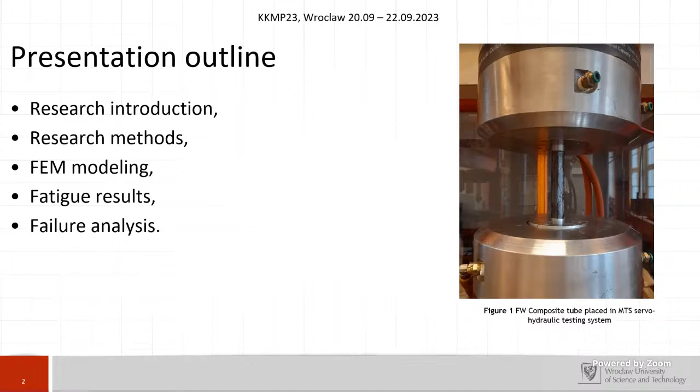Here you can see my sample placed in the MTS testing system. So, at the beginning, the research objective.

Basically, composite materials are still less mechanically understood than commonly used metallic materials. But there is increased use of composite materials, especially in structural engineering and structural objects, and it requires a sophisticated campaign to provide safety of the in-service use of the object.

In that, we identify a gap in the literature, which involves the multi-axial fatigue behavior of composite materials. In my case, it's thin-walled structures made of carbon fiber reinforced polymer. The goal and objective of the research is the fatigue and fracture characterization of CFRP under non-proportional multi-axial fatigue.

The fatigue is investigated under proportional loading as a reference, and non-proportional tension-torsional load. Then the fatigue behavior - I will show SN curves and the results that we've obtained. In the end, in the project, I also would like to estimate the fatigue lifetime, but here it's not included.

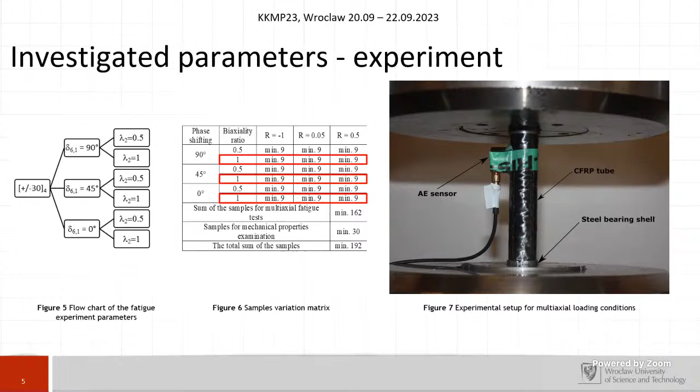Figure 7 presents the experimental setup. As you can see, we have the sample and additionally the acoustic emission sensor.

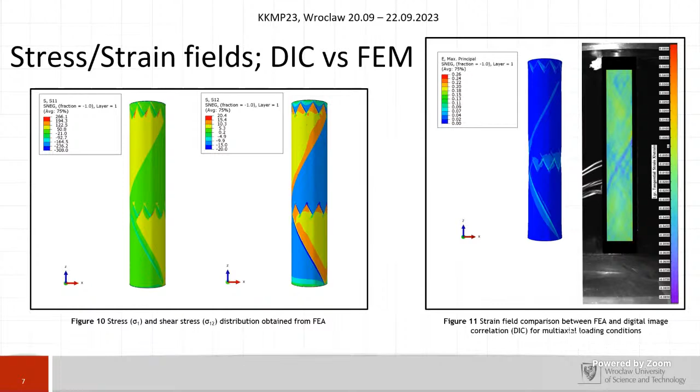Now, I have the validation because additionally, we use the strain gauges to verify DIC and the finite element method. In this case, strain gauges were not able to measure the strain at failure because the strain gauges debonded from the surface due to the large deformation. Thanks to DIC, we could measure the maximum strain.

Now, we had the static campaign. Let's move to the multi-axial fatigue. At the beginning, I would like to show the phase shifting. We have for 3 different stress ratios, 0.5, and it is at room temperature. We have for another stress ratio as well.

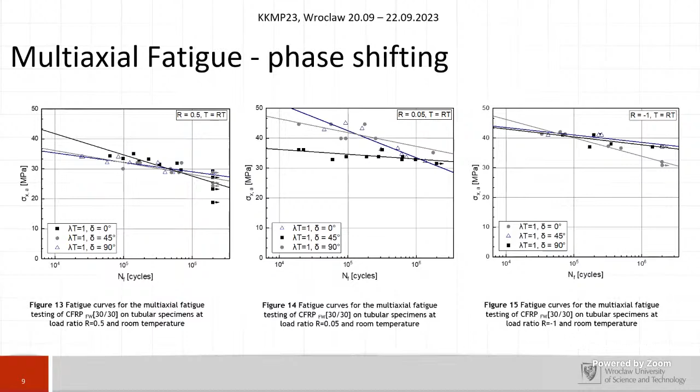So now let's move to the acoustic emission analysis. So far, it's quantitative analysis. I plotted the number of counts and time, and it was possible to see the failure mechanisms such as matrix cracking, delamination, and fiber breakage.

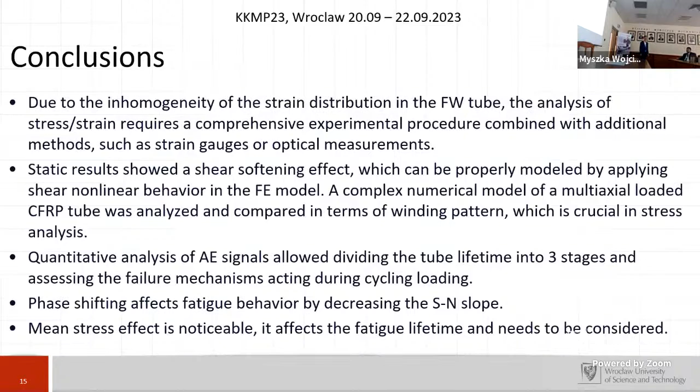The quantitative analysis of acoustic emission signals allows dividing the lifetime of our sample into 3 stages and assessing the failure mechanism. Finally, the phase shifting affects the S-N curve. And in the end, as I said previously, the mean stress effect needs to be considered in further modeling. So thank you for your attention.

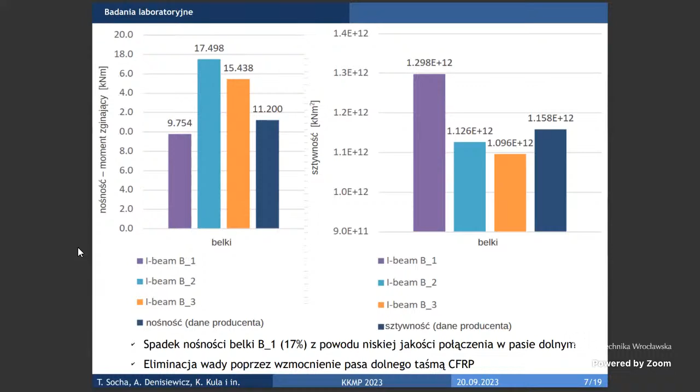Jeżeli chodzi o sztywność tych belek, to sztywność w wypadku tej belki, która uległa zniszczeniu, była większa. Ale to nie ma jakiegoś znaczenia, połączenie było mniej więcej w środku rozpiętości. I powstał właśnie pomysł, żeby wzmacniać takie elementy poprzez zastosowanie materiałów kompozytowych, konkretnie taśmy CFRP.

Proszę kolejny slajd. Model analityczny został zbudowany przy szeregu założeń. Ten model pozwolił nam na określenie odpowiedniej długości zakotwienia takiej taśmy, czyli na jakiej długości ona musi być przyklejona do belki, żeby dawała efekt wzmocnienia.

W modelu analitycznym uwzględniono tylko liniowo-sprężyste zachowanie się materiałów. Wytrzymałość drewna przyjęto taką samą na ściskanie, rozciąganie i zginanie. Analizowano skrajny przypadek, gdzie uszkodzeniu ulega pas dolny.

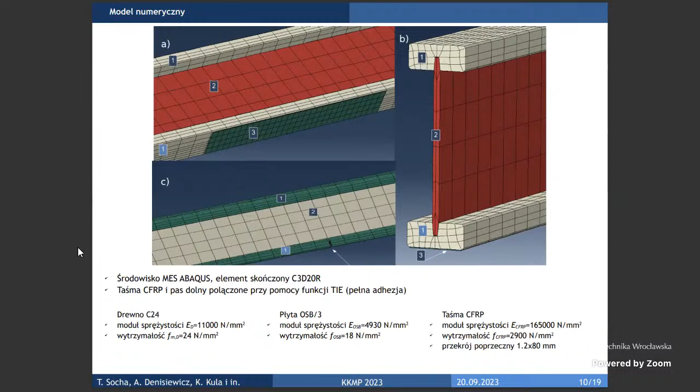Pasy ze środnikiem w modelu zostały połączone na sztywno, tam nie ma poślizgu, jak również przyjęto założenie, że sama taśma z pasem dolnym też jest połączona na sztywno, ponieważ klej ma większą wytrzymałość. Jeżeli ulegnie zniszczeniu, tutaj delaminacji, to po prostu zostanie zerwane drewno.

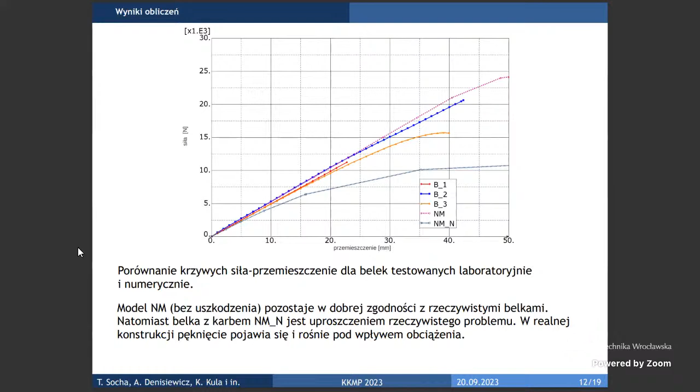Tutaj mamy już zbiorcze wyniki: belka bez wzmocnienia z nacięciem, belki z badań laboratoryjnych, belka z badań numerycznych bez nacięcia i z nacięciem, czyli z symulacją uszkodzenia z cyferką 60 - podklejoną na odcinku środkowym na długości zakotwienia - oraz podklejone belki taśmą na całej długości. Widać, że podklejenie belek na długości strefy zakotwienia już daje efekt, że nośność jest utrzymana w stosunku do rzeczywistego elementu. Natomiast jeżeli podkleimy taśmą na całej długości belkę, nośność wzrasta około 20%.

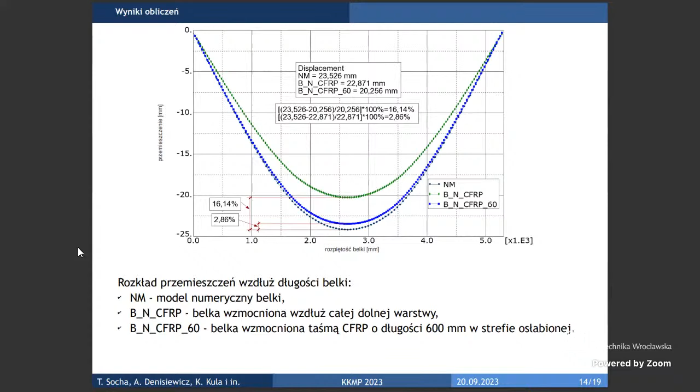Poproszę kolejny slajd. Tu mamy podobną analizę ugięć tych belek. Oczywiście najbardziej ugina nam się belka, która nie posiada żadnego wzmocnienia. Około 3% zyskujemy na ugięciu, jeżeli podklejamy tylko na długości potrzebnego zakotwienia, oraz około 16% mniejsze ugięcie występuje, jeżeli element jest podklejony na całej długości.

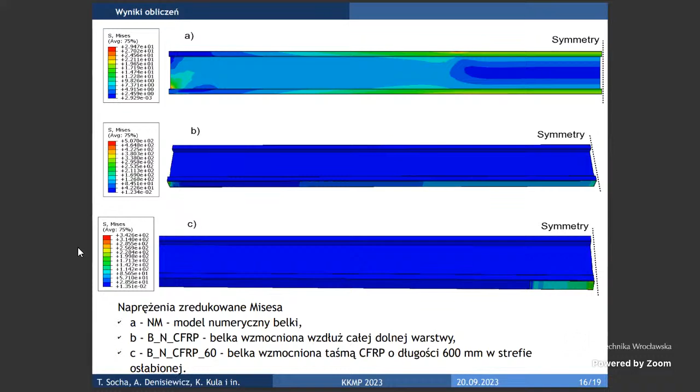I jeszcze 3 obrazki pokazujące rozkład naprężeń zredukowanych. Tutaj głównie ważne jest to miejsce, czyli tutaj jest największa koncentracja naprężeń, tam gdzie taśma jest, powiedzmy, zakotwiona. Jeżeli ona zacznie się od tego elementu odrywać, rozwarstwiać, to od tego miejsca nastąpi delaminacja.

Wnioski końcowe. Model działa poprawnie, to pierwsza rzecz. Da się wzmocnić taką belkę przy użyciu materiałów kompozytowych.

W zależności od długości zakotwienia możemy zyskać mniej bądź więcej na ugięciu, czy zyskać na nośności, aczkolwiek nie ma co przesadzać, bo nieraz gra nie będzie warta świeczki. Po prostu część dolna belki może wytrzymać, ale z kolejnych badań już wiemy, że strefy przypodporowe nie wytrzymają i taka belka zniszczy się na podporach. Także tutaj z takim wzmacnianiem trzeba rozsądnie podchodzić do tematu.

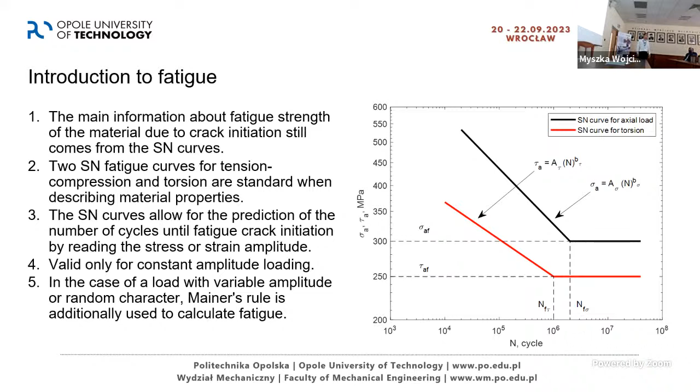Why frequency domain? Because in some cases it's simpler to apply loading to some structures. For example, there are some standards - BMW Group has some standards for automotive tests - or we get the power spectral density from tests done by ourselves, like this one.

For example, if we are using FEM analysis, then we can do that in time domain or in frequency domain. Usually we do in frequency domain to get some interaction between loading and dynamics of the structure, and the results are power spectral density. Why not use the power spectral density to make the analysis in frequency domain? We don't need to switch to time domain - it's time consuming, it's complicated.

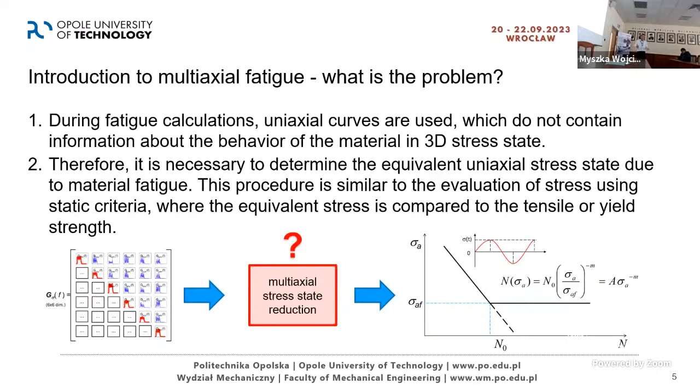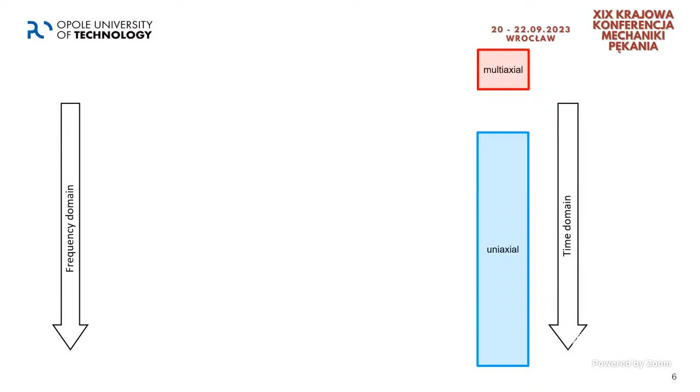Again, why? Because usually the path for fatigue life assessment looks like that. We have the 3D space, so the multi-axial part and the uniaxial part, and we can do that in time and frequency domain. If we are in frequency domain, we have the power spectral density matrix of stresses, and we use this quantity to describe the stresses at the point of the structure. Or we have a stress or strain history in time domain, so we have these two values.

Then, if we look to the uniaxial part, usually applying fatigue life assessment algorithms - in the time domain we have this uniaxial path, and we look for cycles in this part, for example using rainflow methods, and we try to compute fatigue life. In the frequency domain, we have also the power spectral density, equivalent power spectral density, and then some methods, some models, to get the probability density function of amplitudes. It's like the same.

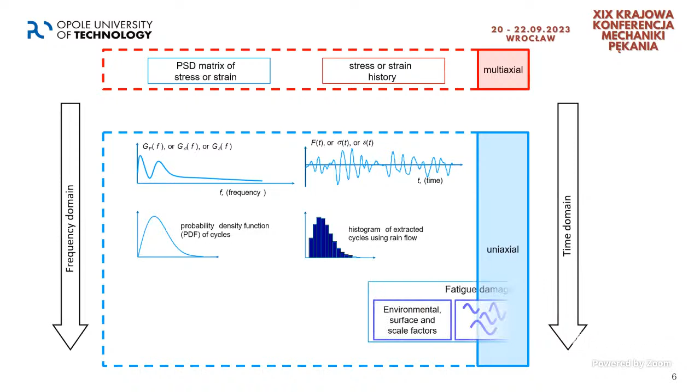At the end, we have some coefficients to take into account the influence of environmental factors, surface, and so on. We have the cycles, we have the SN curve, and we get the damage. What we don't have are the tools to switch from multi-axial fatigue to the uniaxial part, and I will show you some tools in frequency domain.

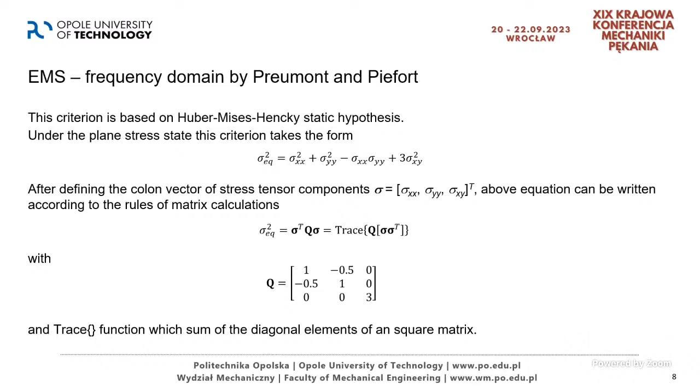If we are looking at the proposition, we see there some mathematical part. This part is rewritten like there, and we get a matrix. And if we are looking for the expected value - I mean in stochastic processes, expected value, standard deviation or variance - in this case it's our variance. And so we get something like that.

And we know also the definition of the covariance matrix - it's the definition shown in this picture. And we see the similarities, because on the diagonal of the matrix we have the values of the vectors to the power of 2. And yes, we see that we have just the same.

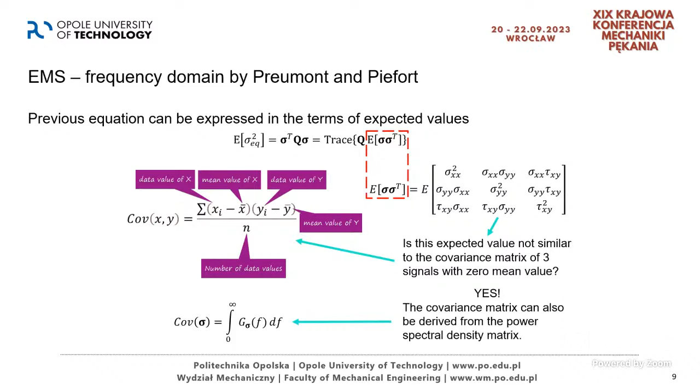And we can also get the covariance matrix from the power spectral density matrix using this equation. If we do that for each frequency, then we also get the power spectral density for Mises stress in the frequency domain, using only the matrix of power spectral density of stresses. For 3D space, we only need to change the vector - now we have 6 components of the stress tensor and also the coefficients matrix. So this is the well-known proposition by Preumont-Piefort to get the power spectral density of Mises stress in frequency domain.

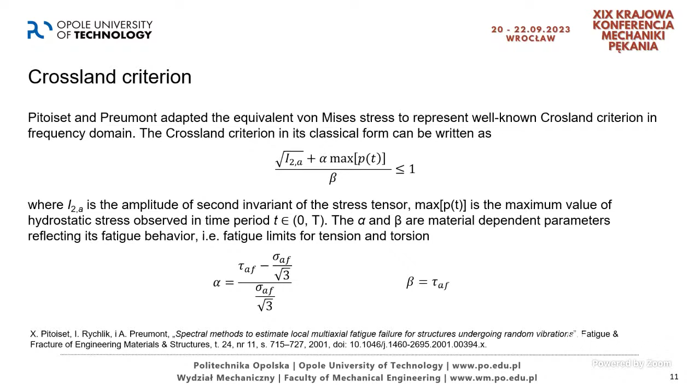Another proposition is coming also from this group, but they rewrite the Crossland criterion also in frequency domain. They use the stress invariant. They assume that this second stress invariant is the same like the Mises stress, or correlated with it, and the hydrostatic stresses - but there is the maximum value, and some coefficients coming from the SN curve.

The rewritten proposition in frequency domain looks like there. We have the standard deviation of the second invariant of the stress tensor and the hydrostatic stresses, and also the coefficients coming from the SN curve.

The only problem was to get the maximum value of the loading, because we have the power spectral density, so we don't have the information about the maximum - there are only statistics about them. So we can use some theories coming from Davenport to get the maximum value of realization of the stationary Gaussian processes, and they use them to rewrite the Crossland criterion in frequency domain.

Okay, and our proposition. So we have some very simple proposition, but they don't act quite well when we have some special materials which don't behave like Mises stress.

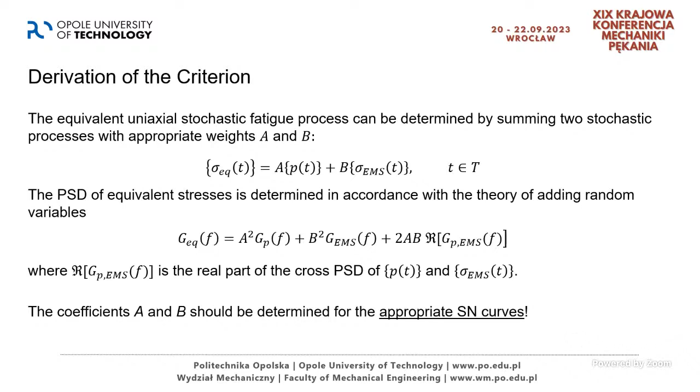How do we do that, how do we get the information? We assume two limit states. The first is the uniaxial tension compression state, so we have only the first part of the Mises stress of the stress tensor components, and the second, like there, only for shear stress. After solving these two equations, we get A and B for uniaxial tension compression PSD.

Very similarly, we get the A and B for pure torsion power spectral density, so the limit stresses are the same, but we try to use another SN curve for torsion.

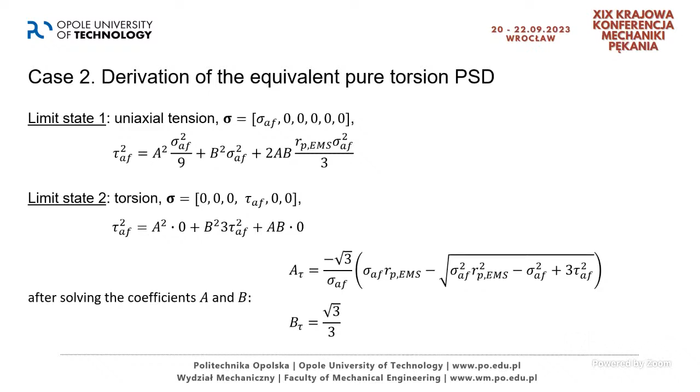Okay, and some experimental verification, very simple experimental verification, coming from the literature. We have multi-axial fatigue results from Claudio, Reis and Freitas, who made tests on cruciform specimens where the loadings are perpendicular to the main axis. And okay, the last slides.

Using Mises stress, we can recompute the Wöhler curve. The Wöhler curve for uniaxial is just black, and for a lot of combinations with two forces, we see that with Mises stress it should lie on the same line, but it doesn't.

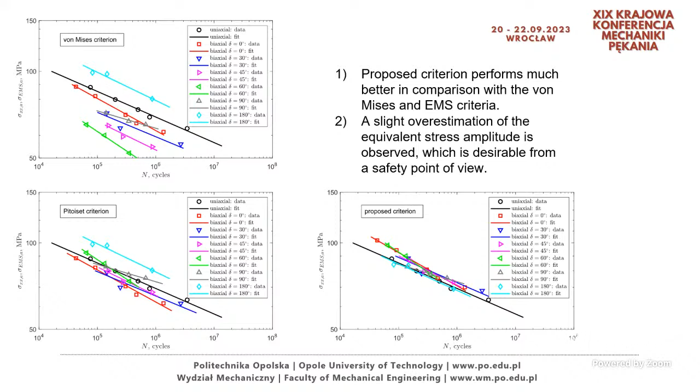The Pitoiset and Preumont proposition is better. We see a lot of combinations are near the black line, and our proposition, I hope, is the best.

And conclusions. So we can apply this multi-axial fatigue criterion in the frequency domain, without switching to the time domain, to get the power spectral density of equivalent stresses.

The power spectral density approach performs better than the previous proposition.

And we can use, because we have the two coefficients for weighting the values, A and B, this method for fatigue life assessment under uniaxial tension compression or torsion. We can choose that, so it's good to know we have this possibility.

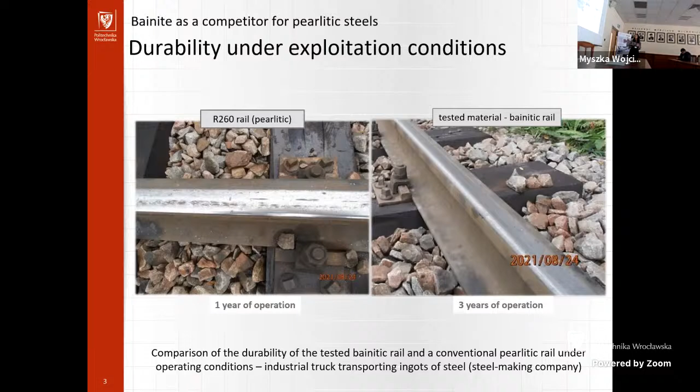Also the fatigue properties, the fracture processes of this material, and in the future also the weldability, to produce a complete laboratory material in industry. This is important because if we want to produce tracks for high-speed rails, we need to be sure our material is safe and provides high durability compared to typical conditions.

And what is the difference between the steels? Of course it is well known, but I would like to also say something about bainitic steel, bainitic material. The major difference between them is, of course, the structure and structure constituents. For pearlitic steels, it is ferrite and cementite with lamellar morphology. Of course, it's well known.

In contrast, the bainitic steels constitute of bainitic ferrite with significant carbon supersaturation and also significant tetragonality of this system, together with retained austenite with both morphologies, film-like and also blocky.

It is important to say that the thickness of the constituent is totally refined. So the thickness of retained austenite films is in nanometric scale. In terms of bainitic ferrite, the thickness of the layers is approximately 200, 300 nanometers. So the scale of this microstructure is in submicrometric scale. It's not nanomaterial, but close to nanoscale.

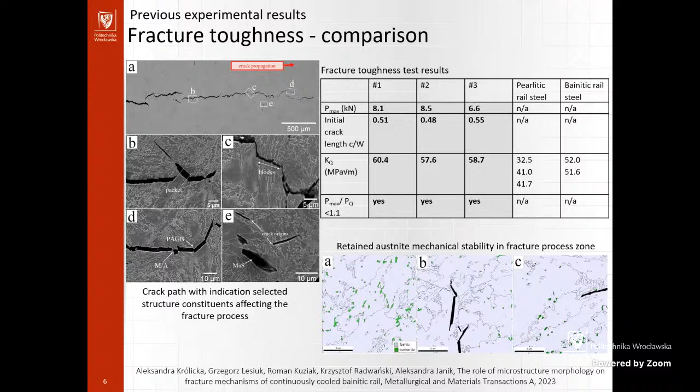And finally, we developed the complete cracking process in this material. We also identify all crystallographic units of bainitic steels, and also identify why different facets on fractographs occur compared to the individual structure constituent. So we can say improve fracture toughness by controlling the microstructure in the future.

And then, of course, the safety of rails is important. So we wanted to analyze fatigue crack growth rate in typical loading mode. We used different asymmetry, cycle asymmetry, and compact samples, typical compact samples.

And the results are totally controversial, because in the literature, the majority of results indicate that, yes, bainitic steels exhibit higher fatigue crack growth resistance compared to pearlitic steels.

In terms of our investigation, the results in the Paris law regime are totally similar, without any significant difference. So it's okay, because we also wanted to improve other in-use properties of this material.

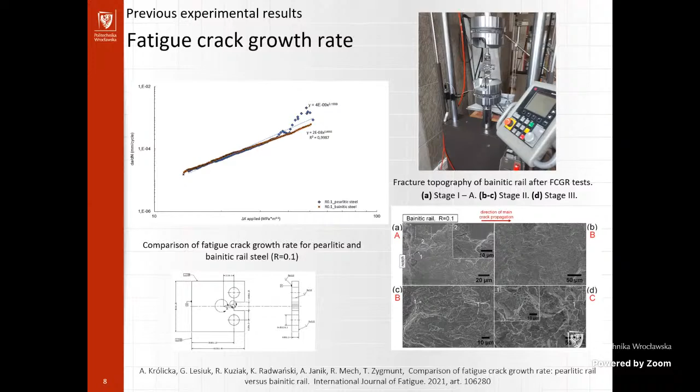We also identified different cracking mechanisms in both materials and compared them, but finally the results indicate similar fatigue growth rate. The main part of our presentation is mixed mode fatigue growth experiments considering bending and torsion loading types.

We use dedicated equipment for this investigation. During this test, we analyze the ratio between torsion moment and bending moment, expressed as tangent alpha, using tangent 30 degrees and 45 degrees, and specific rectangular samples for this investigation.

Then, of course, we support our experimental investigation with numerical simulation. We also use this assumption and Y correction for our analysis to identify different modes and decompose our results.

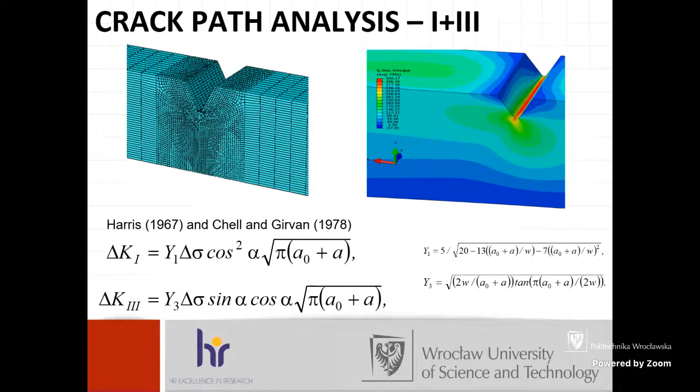Finally, I wanted to say something about the conclusion and perspectives, because this is only the pilot investigation, the first investigation of this material in terms of mixed mode loading conditions. So we need to perform more investigation, more comparison, more in-depth analysis from the material point of view.

In conclusion, we investigated a complex structure with different structural constituents, with retained austenite, bainitic ferrite, martensite, without precipitation of carbide.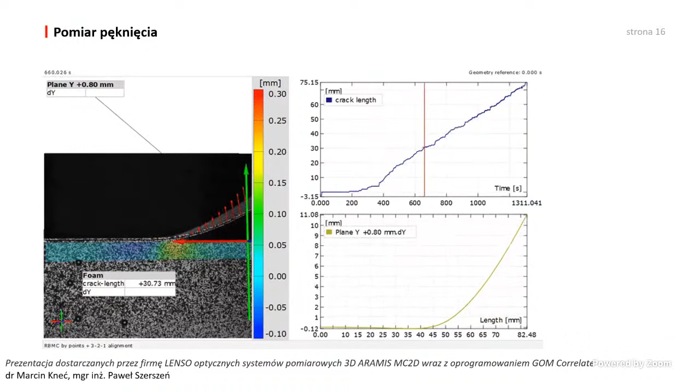Musimy znaleźć, gdzie jest ta delaminacja. I teraz jak ją znaleźć? W tym przypadku nie musimy śledzić żadnych odkształceń. Tutaj się pojawia bardzo ciekawe zjawisko, bo to jest próbka, która ma sztywną piankę poliuretanową i kompozytową nakładkę, kompozytową skórkę, którą w standardowej próbie oddzieramy. Ale widać ewidentnie, że jeżeli obserwujemy przemieszczenia y-owe, dy, zielona oś do góry, to widzimy, że pojawia się wartość maksymalna, którą bez problemu możemy śledzić.

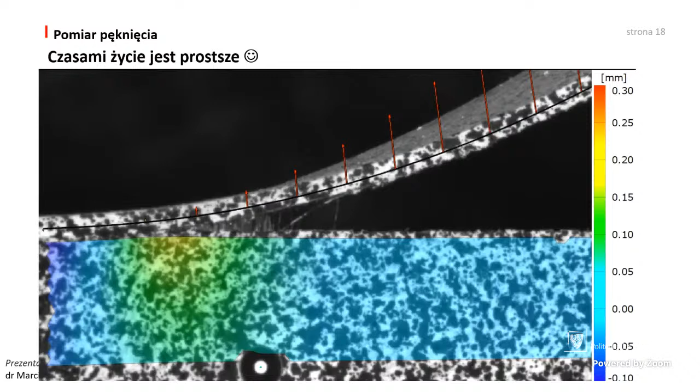Tutaj widzimy wartość maksymalną w tym miejscu, ona się teraz pojawia tu. W darmowym oprogramowaniu bez żadnego problemu możemy wskazać to miejsce i później śledzić położenie tego punktu, jego współrzędnych. W ten sposób, jeżeli założymy, że prawdą jest, że w miejscu maksymalnego wytężenia tego materiału, przemieszczenia w tym przypadku jesteśmy w tym miejscu i tam jest to pęknięcie, to możemy takie badania bez żadnego problemu wykonać.

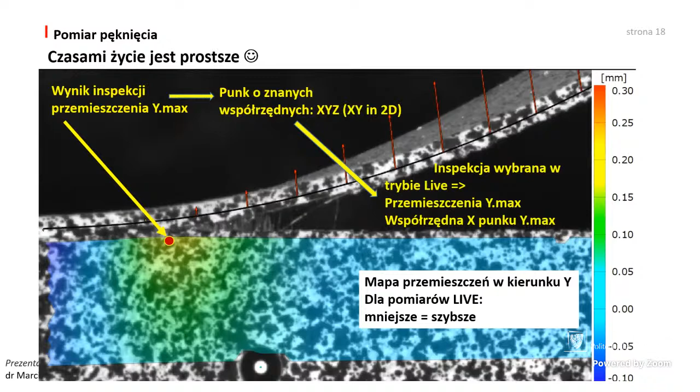To jest analiza, jak to wygląda. Tak naprawdę chodzi o to, żeby wykorzystać tutaj funkcję max displacement y, tylko tyle. To jest najważniejsza rzecz. Jeżeli Państwo będziecie zainteresowani takimi badaniami, to chętnie przy stoliku opowiemy, zapraszamy do nas.

Oprócz takich zwykłych badań, biorąc pod uwagę to, że mamy wiele różnych urządzeń w naszej ofercie, w portfolio, jesteśmy w stanie łączyć różne badania wykonane systemem ARAMIS z maszyną, ale przykładowo najpierw możemy zeskanować tą próbkę w CT. I taki ostatni mój pomysł na artykuły, na tematy naukowe, to jest wykorzystanie analizy CT do tworzenia modeli MES-owych i później do liczenia różnych rzeczy, porównywania i walidacji modeli MES.

razem z badaniami wykonanymi dokładnie na tych samych próbkach, które zostały zeskanowane. To jest przykład próbki, którą na jednej konferencji - tam było oczywiście więcej próbek - ale chodziło o to, że mamy tutaj próbkę, ta akurat ma wypełnienie około 60, może 70%, jest to zwykły wydruk z drukarki 3D. Takie próbki zostały zeskanowane w tomografie i następnie widzimy w tym samym układzie współrzędnych - czy to będzie tomograf, czy ARAMIS, czy ATOS - to jest zawsze to jedno oprogramowanie, więc jeżeli nauczymy się jednego, to na każdym to będzie działało.

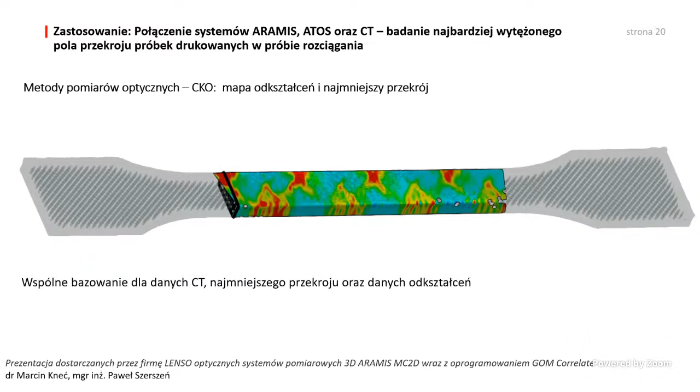Tutaj widzimy, jak wyglądają - to jest mapa odkształceń głównych pierwszych w tym momencie. Może trochę niefortunnie, bo liczyłem, że bardziej na środku ta próbka pęknie, ale ona pękła w tym miejscu. I później po analizie okazało się, że faktycznie w tym miejscu jest ten przekrój najmniejszy, najbardziej wytężony. To wiemy po prostu przed badaniami, bo mamy ją najpierw zeskanowaną w CT.

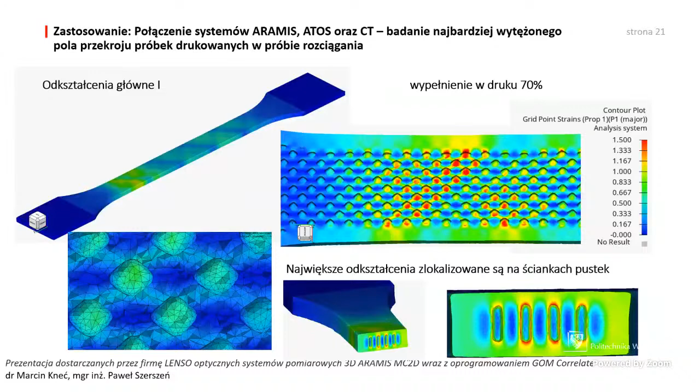MES oczywiście, ARAMIS jest w stanie pokazać tylko to, co będziemy mieli na zewnątrz. Oczywiście na te wyniki widoczne na tej stronie zewnętrznej będzie wpływało to wszystko, co jest w środku. Ale mając MES, który jest zwalidowany, który dotyczy tej samej próbki, mamy tutaj walidację miejsca pęknięcia, to jesteśmy w stanie zobaczyć, jak wyglądają te analizy. Ten model, który tutaj widzimy, to jest zbudowany model na siatce STL, zebrany z tomografii.

Teraz dwa słowa o tym darmowym oprogramowaniu, jakie pobrać. Zachęcamy - trzeba pobrać, jak Państwo wejdziecie, szukając na przykład GOM Correlate czy GOM Viewer, należy pobrać GOM Correlate. Po rejestracji będzie możliwe wykonywanie pełnych analiz. Rejestracja jest oczywiście darmowa, żadne informacje, spam nie przychodzi. Muszą Państwo tylko w zamian za to oprogramowanie podać swoje dane.

I będzie można później po rejestracji wykonywać sobie na projektach, na przykład wykonanych systemem 3D, pełne analizy w 3D za darmo, bo projekt już był nagrany tym systemem z licencją, lub zaimportować swoje zdjęcia z siatką, taką jak tutaj obserwowaliście Państwo na poprzednich slajdach, do dalszych różnych analiz.

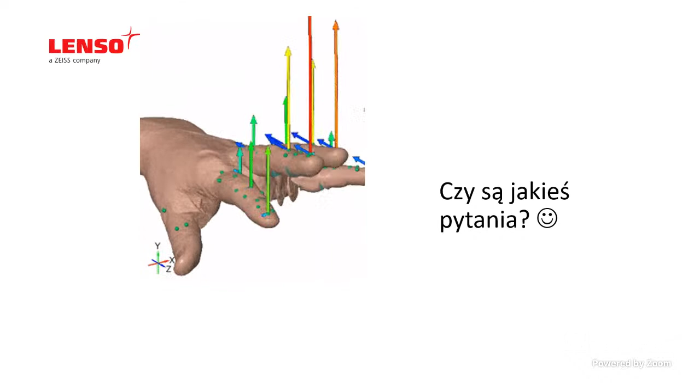I to też jest zabawa, którą wykonywaliśmy naszym systemem. To są po prostu markery naklejone na dłoni, a tutaj są pocięte modele STL dłoni zeskanowanej, więc to nie do końca tak to wygląda, ale mierzyliśmy tutaj przemieszczenia 3D markerów naklejonych na dłoni, bo taką metodą też jesteśmy w stanie mierzyć.

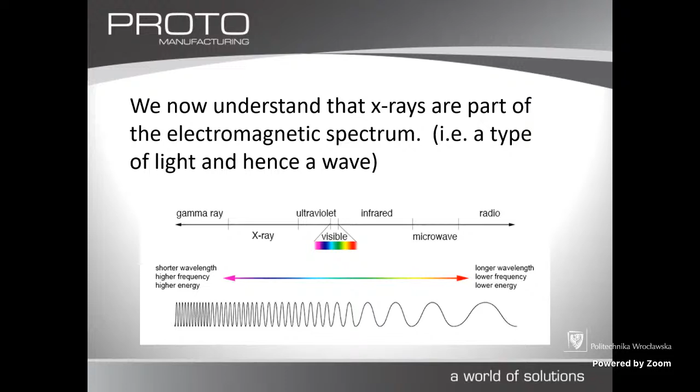And matter, or all material that we make interact with X-rays, is composed of atoms which have electron clouds. These interact with X-rays in two different modes, two different ways: absorption or scattering.

Absorption is that part which we use for X-ray transmission, where we do exactly those X-rays of hands and other body parts. This is also something to bear in mind - it is dangerous because it ionizes your atoms. So this is what it does to us.

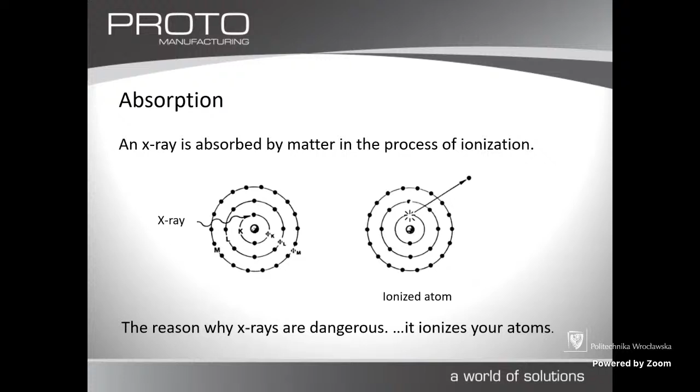We want scattering. This is what we will be using in our practical sense, and that is where an X-ray wavefront progresses, hits an electron, and the electron becomes a secondary source of radiation of the same frequency.

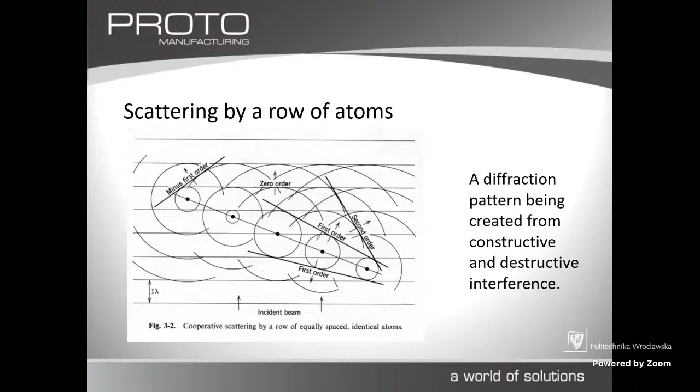If we imagine a row of atoms, we will have an incident beam diffracted in different orders, waves of different orders, so to say, like harmonics. So a diffraction pattern created by constructive or destructive, positive or negative interference is then formed.

We can imagine, provided of course the condition that the waves are coherent - that they are of the same frequency and in the same phase - we will have either constructive or destructive interference. Diffraction is a result of this interference.

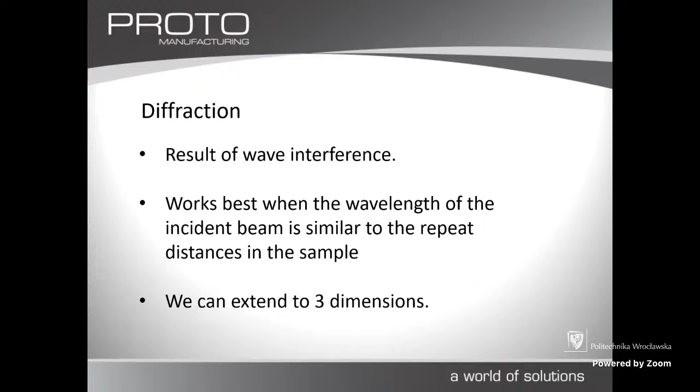It works best when the wavelength of the incident beam is similar to the repeat distances of a sample, meaning its atomic or lattice spacing. We can also extend it to 3 dimensions rather than what we just saw in the drawing. These 3-dimensional spacings, with distances of a magnitude of order similar to that of the wavelength of X-ray radiation, are crystals - and that is most of the material we're concerned with.

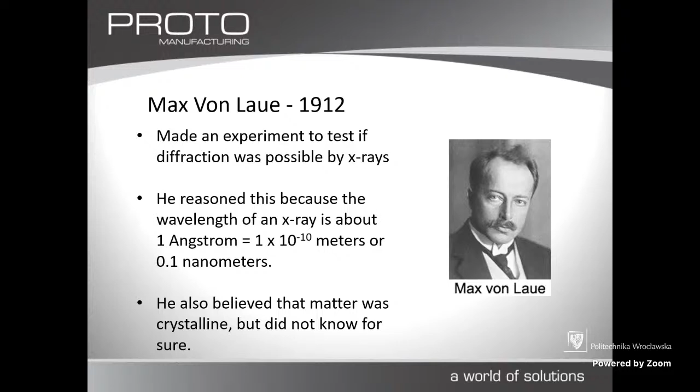So, after all this long introduction, this is one of the first application examples. Those single grain turbine blades, cast in nickel-based superalloy, are either single crystal or epitaxial polycrystal. They are directionally solidified blades to give the best resistance to high temperature creep. In modern jet engines, the centrifugal force and the temperature in which they operate is so high that after several hours of a jet engine working, they would actually start rubbing, fricking against the hull of the engine. The technology has been known for 30, 40 years, developed in the first place by Pratt & Whitney, and by now produced by practically every jet engine manufacturer.

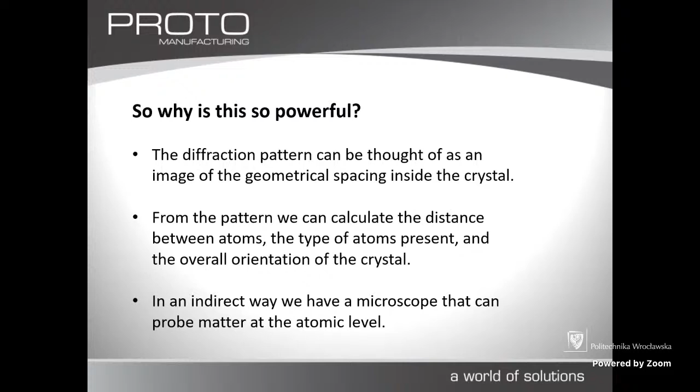So why is it so powerful? The diffraction pattern can be seen as an image of a geometrical spacing. It's like we have a microscope capable of looking into a crystal lattice.

Now, what is the relationship between those diffraction spots? Let me go back for a moment—we saw these spots. They come from each of the HKL Miller indices, but they are spaced. There are distances between them that are characteristic for a particular crystal lattice. So what is the relationship there? The father and son, William Henry and William Lawrence Bragg, discovered this relationship back in 1913, and again got a Nobel Prize for it. Quite a density of Nobel Prizes here.

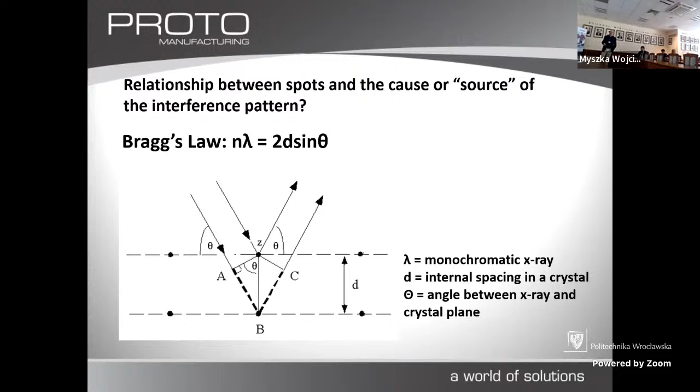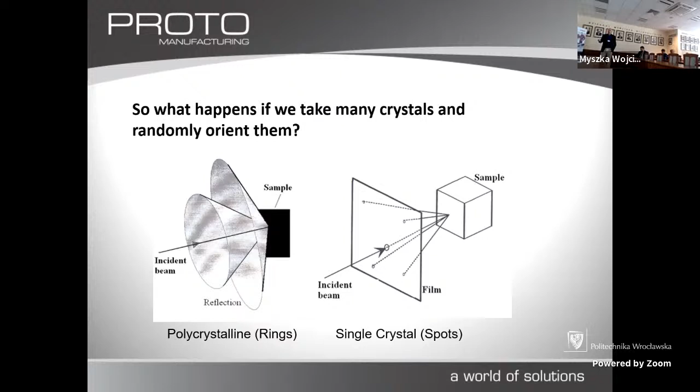Then imagine, rather than having just a single crystal with a regular lattice, if we take randomly oriented many crystals, instead of getting a beam, we will have a cone, whose intersection with a film plane will give us the Debye ring. In the original Laue experiment, we had an incident beam passing through a crystal and projecting a spot on a film, proving the compliance with Bragg's law of diffraction.

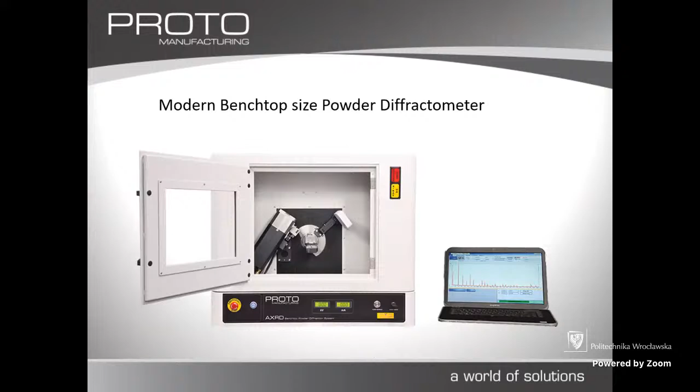Those spots and the characteristic radiations, characteristic diffraction lines, are what is now known as powder diffraction. In those randomly oriented polycrystals, we obtain a diffractogram on a display, identifying the material by the distances between the lattice planes and the corresponding 2-theta positions on the diffractogram. A diffractogram like this is a fingerprint for the material. If we look at different materials, we can see what a complex diffraction pattern of several phases looks like. There are techniques, mostly software, used in so-called Rietveld refinement, where we let the computer analyze a very complex diffractogram to determine what materials, and in what quantities and quantitative relations, are present in a given sample.

It is used for forensic analysis. It is used for production quality control in the pharmaceutical, paint, dye, and cement industries, among others.

One example, already mentioned in a few presentations, is retained austenite. We have a carburized surface of a component where we want a tough, elastic core—for example a shaft—and a hard, wear-resistant shell. After carburization and quenching, we will have some retained austenite, part of it that did not transform. We want to analyze how much of it there is. If there's too much retained austenite, it may continue transforming during wear, during the use of the component, which would impair its properties—it will not have been normalized, so it will be extremely brittle.

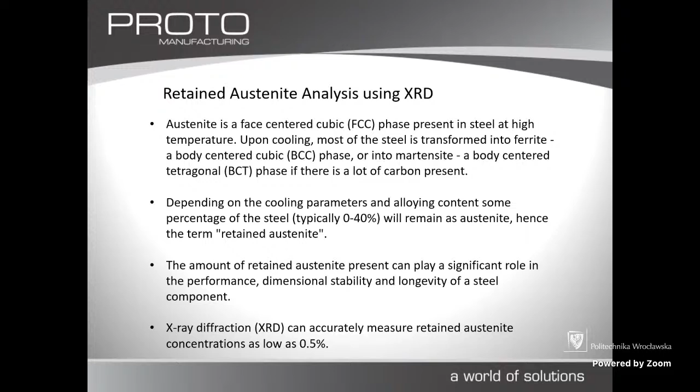It may also affect the dimensional tolerance of that component. So in some applications, such as special bearings for the aerospace industry, you may want less than 1 or 2% retained austenite. In most automotive cases, 20–30% is still accepted. With modern equipment, powder diffractometers, we can measure percentages as low as 0.5%.

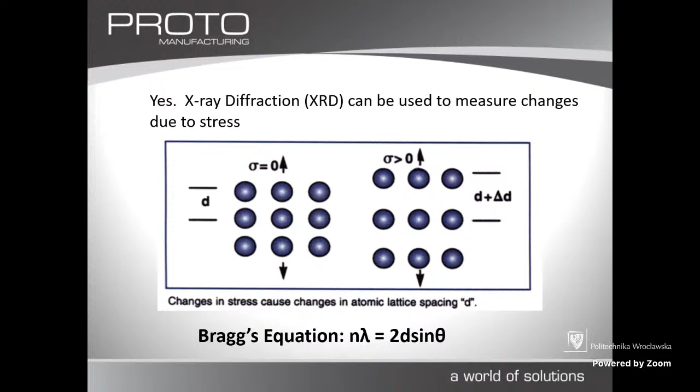So what is residual stress? It's a distribution of deformation in the material present after the loading forces have been removed. This definition is more for the comfort of describing it - the atoms themselves or the crystals don't know the difference between internal and applied stress.

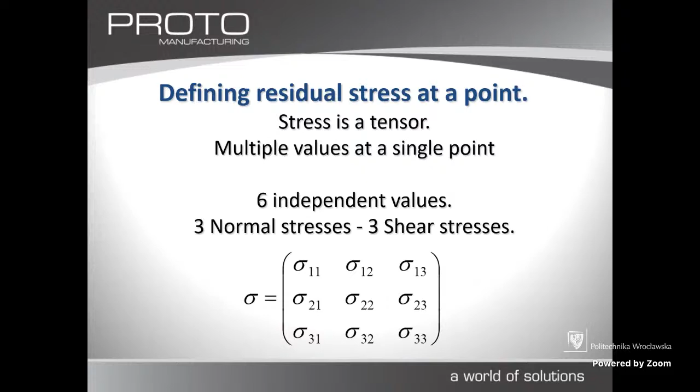If we define a stress with its components, normal stresses and shear stresses, does residual stress affect a component? In the majority of cases, we don't like tensile stresses - they favor crack initiation and crack growth. Compressive stresses are good, we like them, because they prevent the surface from crack initiation and growth.

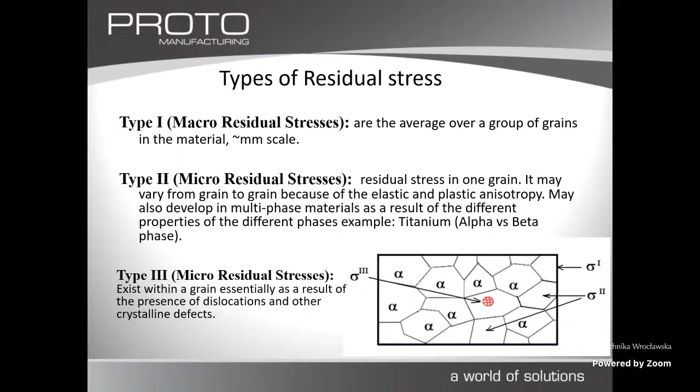We also define the types, whether we talk about micro or macro residual stresses - I think this is basic common knowledge to everybody. Their causes may be mechanical, thermal, or phase changes, and in most cases it's a combination of all of these.

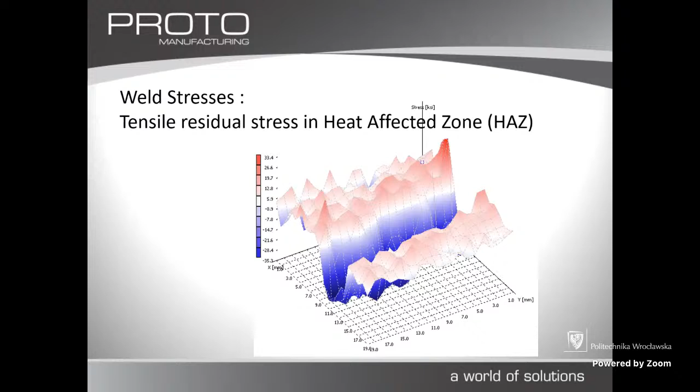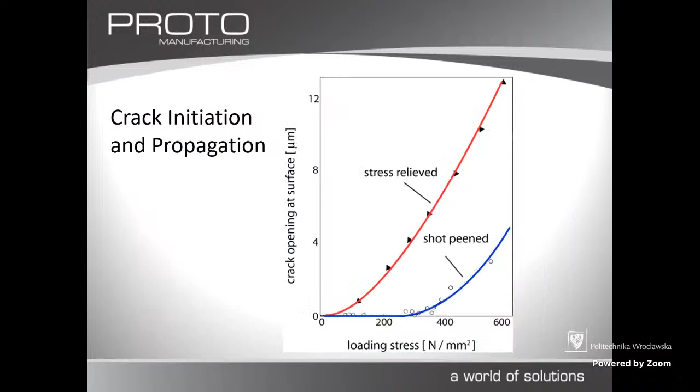Do I have any exciting pictures to show as time is pushing? Conclusions: why do we prefer X-ray diffraction? It has excellent spatial resolution, can measure complex geometries, and it's fast and non-destructive.